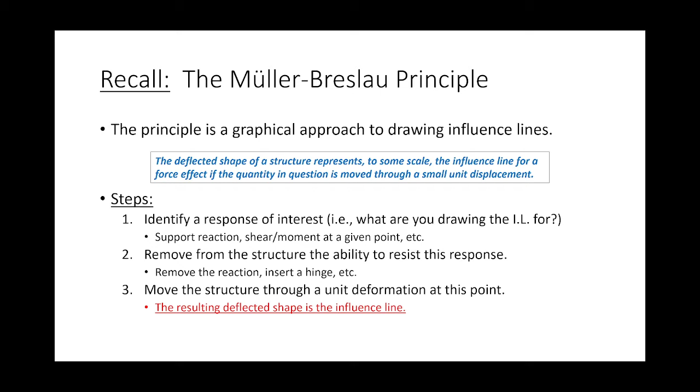What you need to do is remove from the structure the ability to resist that response. Remove the reaction. If it's moment, you insert a hinge at that location, and we'll talk a little bit more about that today. Then you move that structure through a unit deformation at that point, and the resulting deflected shape is the influence line.

And so when we did influence lines for reactions, this is kind of what we did. I gave you 2 homework problems. One of them was, I'd say, simple, and one of them was maybe not so simple. Is that a fair way of looking at it? One of them was a little bit more involved. But there are some patterns that we recognize for influence lines for reactions.

For example, for reactions, we knew that the influence line equals 1 at the reaction of interest, and 0 at all other reactions. So if I look at the influence line, let's say for the reaction at B, it's 0 at A, 0 at C, but it's 1 at B. Okay? They're always linear. They are influence lines.

They are linear, and internal hinges serve to change the slope of the line. So this beam is comprised of sort of 2 rigid links. Even though we're dealing with deformable structures, because we're removing responses, we're creating unstable mechanisms, so they act like rigid links. So this beam is comprised of 2 rigid links.

So the influence lines for all 3 of these are bilinear, right? One line, two lines, one line, two lines, and even this one is one line, two lines. And the change in slope, the place where the influence line kinks, if you will, and changes slope, is at the hinge. Does that make sense?

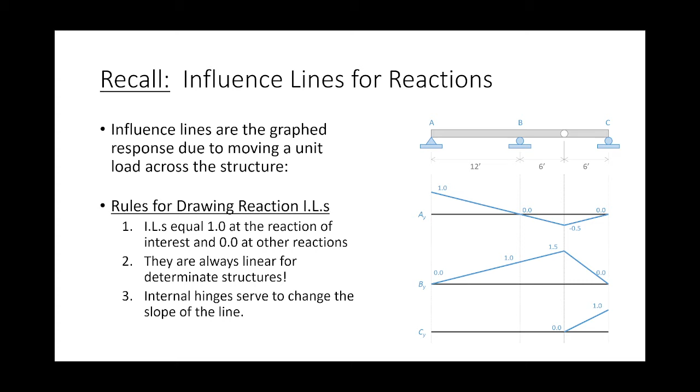Okay, let's talk about influence lines for internal shears and moments. So like before, we have to pick a spot of interest, okay? So let's say I have a simply supported beam, and I'm drawing the influence line for the internal shear and the internal moment at a particular point. So this is a simply supported beam, A and B, and I'm drawing an influence line at this section. I could call it section 1-1.

I could say I want to draw the influence line at point C, or this is point D. It doesn't matter. The book sometimes uses letters to denote the spot, but I usually do section cuts. Now here is what some of these influence lines are going to look like qualitatively.

So this is the influence line for the shear at that section. This is sort of what it looks like, and we'll talk about how to construct this here in a bit. Here's the influence line for the shear at section 1-1.

What's going to happen is the left side is going to tend to deflect downward, and the right side is going to tend to deflect upwards. It's not always the case that one side deflects down and one side deflects up, maybe only one side deflects up or only one side deflects down. But if you have two different changes, the left side's always going down, the right side's always going up, and that owes to our sign convention.

Now, I'm curious if you all have been paying attention. If I were to take a ruler and measure the length of this line right here, what do you think that measurement's going to be? How long do you think that jump is?

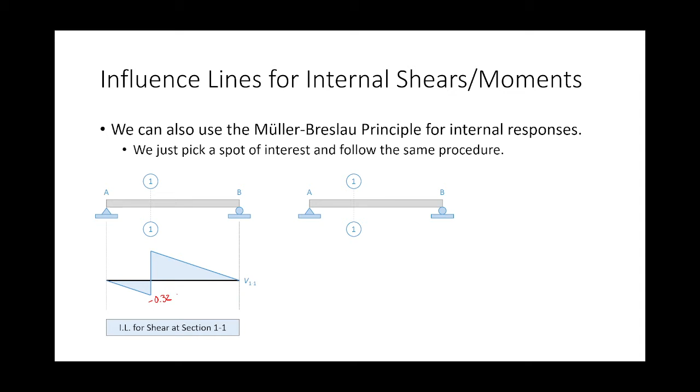So for example, just to put some numbers on this, let me move my keyboard here. If this is negative 0.32, just to put a value on this point right here, then this point right here is going to be positive 0.68. That total jump is always going to be 1, right? If this is positive 0.75, this is negative 0.25. If this is a half, negative a half. If this is 0, that is 1.

The jump is always 1 because that's the magnitude of the load that we're moving across the structure. Does that make sense? Everybody okay with that? Okay, so that's just something to keep in mind.

Okay, now that's what an influence line for shear looks like. Here's what an influence line for moment looks like. Now I will go ahead and tell you that this point right here is not going to be a magnitude of 1. In fact, it's probably going to be something different. It might be a magnitude of 1.5 or 2.6 or whatever. But how we determine this magnitude, just like how we determine how much this is and how much that is, is going to be the focus of today's lecture.

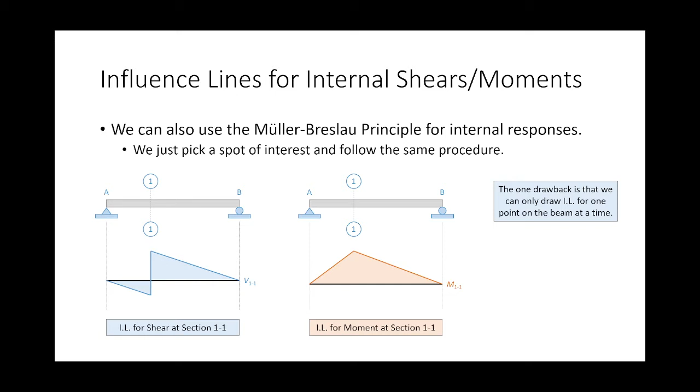Now, just so you are aware, the only drawback to drawing influence lines for internal shears and moments is that you can only draw an influence line for one point at a time. I can draw an influence line right here and get the response. So to be clear, taking this influence line or this influence line doesn't really matter. This influence line tells you what the moment is at this point when the load is anywhere on the structure, and this influence line is telling me what the moment is right there.

So if I can only draw the influence line at one point of the structure at a time, maybe the question is how many points are enough? How many influence lines do I need to draw as an engineer to fully encapsulate the structure? Well, common practice among bridge engineers is to draw influence lines at every 10th point along the span. That's very common in bridge engineering applications. So if I have a 60-foot bridge, I will draw influence lines every 6 feet, for the internal response at 6, 12, 18, 24, and so forth.

And that is usually enough to fully categorize the envelope of loads that a bridge could experience. And you're like, what's an envelope of loads? We'll get to that later.

Okay, now before we review the rules for influence lines for internal shears and moments, we need to go back to our sign conventions. Internal response influence lines follow the sign convention that we've been adopting this entire semester, there's nothing different. So when you cut a section and look to the left, we say downward shears are positive. And when you cut a section and look to the right, we say upward shears are positive.

Do you remember that? So whenever we draw an influence line, let me go back to this. Here's the influence line for shear. The left side went down, the right side went up. That's because, according to our sign convention, the left side goes down, the right side goes up. So that's why our influence lines for shears look the way they do.

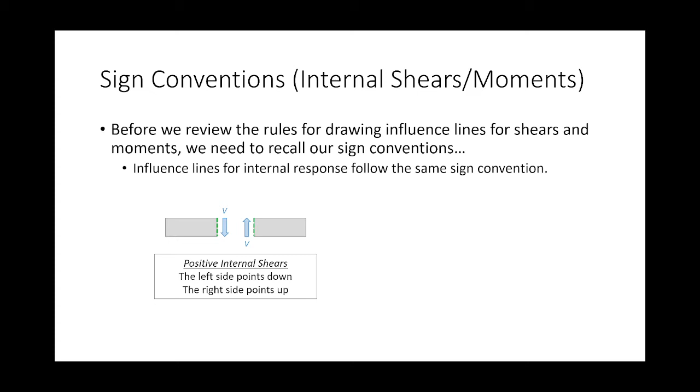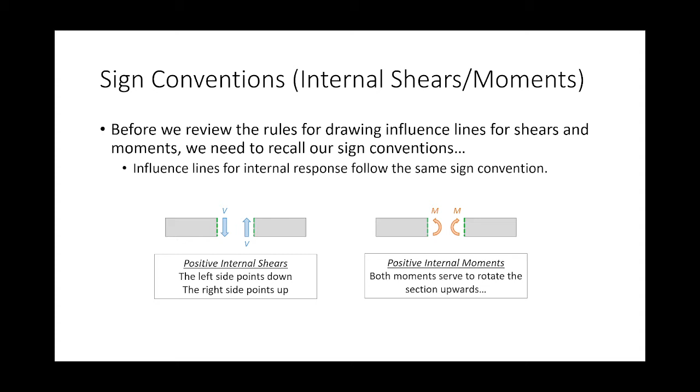For moments, this is our sign convention that we've been using. Whenever we cut a section and look to the left, that's what the moments look like. Cut a section, look to the right, that's what moments look like. Those are what positive moments look like. So look at what's happening with the moments right here. If here's my point, they both serve to sort of rotate it up like that. Here's the influence line. They're both rotated up. Does that make sense?

Okay, let's talk about these one at a time. Let's get into some details. This is kind of important. Let's look at the influence lines for drawing internal shears.

So we go to the Mueller-Breslau principle. We release from the structure the ability to resist shear at the point of interest. So what that means analytically is we institute a shear release. Now we've never dealt with shear releases before in here. This is the first time and really only time we'll deal with them in structural analysis. But the long story short is that a shear release releases the ability to resist shear, but not the ability to resist moment. So I could take that section and shear it, but I can't bend it. It'll just freely displace.

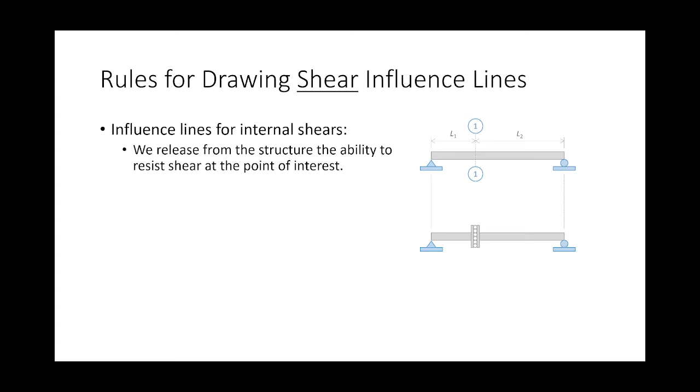Now what that means is this, and you'll understand it when we look at the final shape here in a second. So I release from the structure the ability to resist shear, and then I move that point through a unit displacement. That unit displacement typically means that the left side tends downward, the right side tends upward, and there's my influence line. I propose that total jump is 1. Now that total jump is 1, but that doesn't tell us how to determine the size of those jumps. This might be 0.4, negative 0.4, and this might be positive 0.6. This might be negative 0.8, positive 0.2. How do we determine the size of those jumps?

Well, if you recall, this is a shear release, not a moment release. So we have to release the shear while at the same time attaining moment equilibrium. The way that we attain moment equilibrium is that in order to release the shear and not the moment, these two lines have to be at the same slope. So when we construct our influence line, we know that this height plus this height equals 1, and we know that this slope ratio, h1 to this length, equals h2 to this length. Once we've got that, we can solve for one of our heights very easily, and then the rest is just plug and chug with slope ratios. Don't worry, we got an example we're going to do here in a bit. This is actually really, really easy. Okay, with me so far?

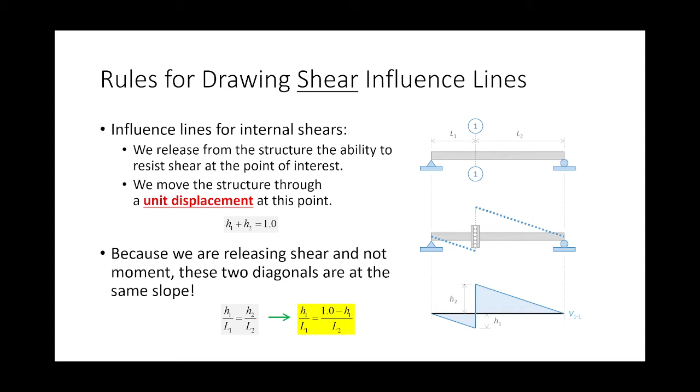Okay, this is shear influence lines. Now let's look at moment. With moment, we identify a point of interest and we remove from the structure the ability to resist moment. Now that one's easy. We install a hinge. So whenever we're drawing an influence line for moment, we place an internal hinge at the point in question.

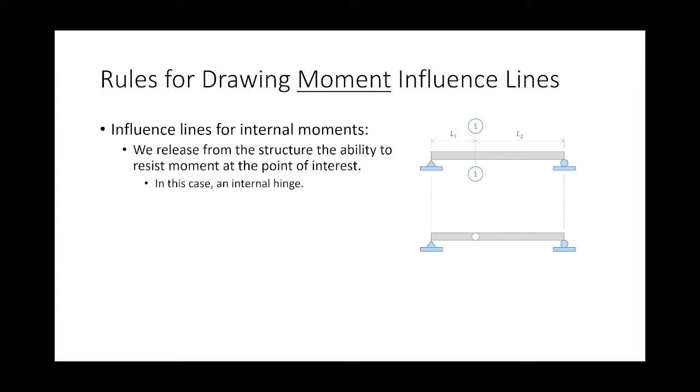We then move that point through a unit deformation, but because we're talking about moments, we move it through a unit rotation. What a unit rotation means is that I rotate this up a little bit and I rotate this up a little bit. And when I say unit rotation, what I'm saying is that the slope of this line plus the slope of this line has to equal 1. So the slope of these two lines has to equal 1.

The slope of this line is rise over run, h over L1. The slope of this line, rise over run, h over L2. So h over L1 plus h over L2 is 1. I can easily solve for h. Does that make sense? Don't worry, we're not going to just say good luck. We're going to go do some examples.

Well, yes, but you're solving for the height so that doesn't happen. Don't worry, you'll just follow along with it.

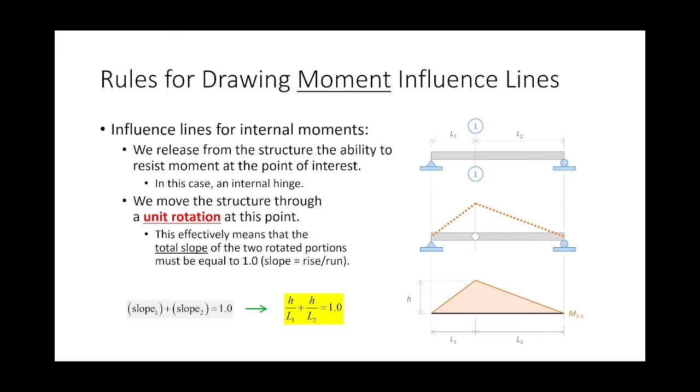Any questions? All right, here's the summary slide. This is the expression for shear influence lines that we can derive. If you want to plug and chug, you can, but I find it easier to just look at the influence lines and know the patterns. This is the expression for shear influence lines, and this is the expression for moment influence lines.

Now, the patterns are different. What do I mean by the patterns? Influence lines for internal response will always equal 0 at all of the reactions. Here's this beam, here's this table. If I'm sitting right here on the leg of the table, how much internal response is right here? Nothing, right? Because I'm focusing all of my load on the leg. The table isn't seeing anything. It's only until the load actually starts acting on the table that I generate internal response in the beam.

If the unit load is over the reaction, the beam experiences no load. They're always linear. And again, internal hinges serve to change the slope of the line. So, for example, with this beam, if I do the moment influence line, I put a hinge here, 2 rigid links, 2 lines. Does that make sense?

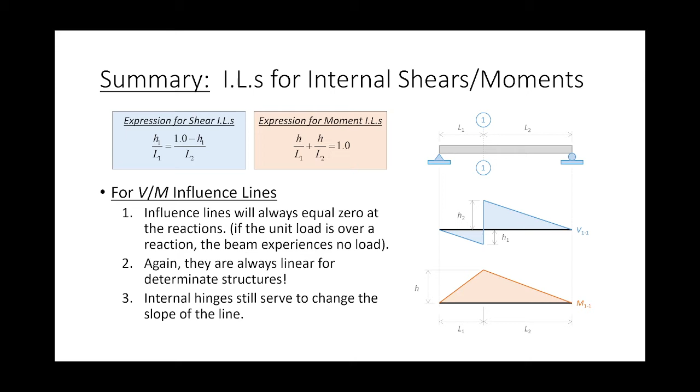Let's do some examples. I think the easiest way to understand this is to do some examples. If you remember, we're going to do example 1 and example 2. We already did these examples, we did the reactions. Now we're going to do the influence lines for internal shear and moment. For this first one, you're going to do internal shear and moment right here, next one internal shear and moment right here. So let's see what happens.

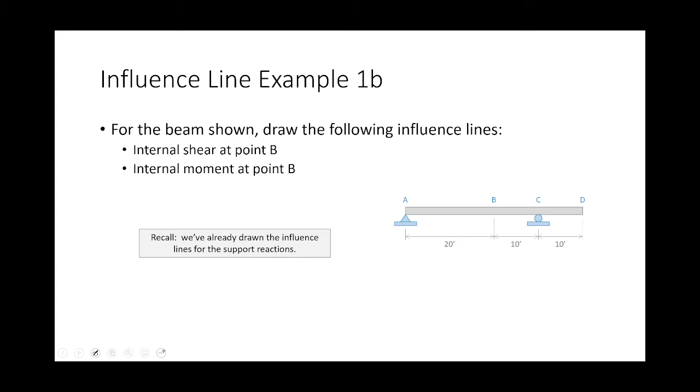The dean is calling me. Give me one second. I will say I'm in class.

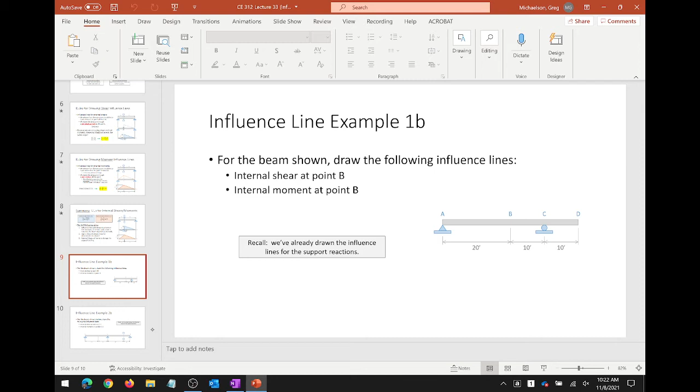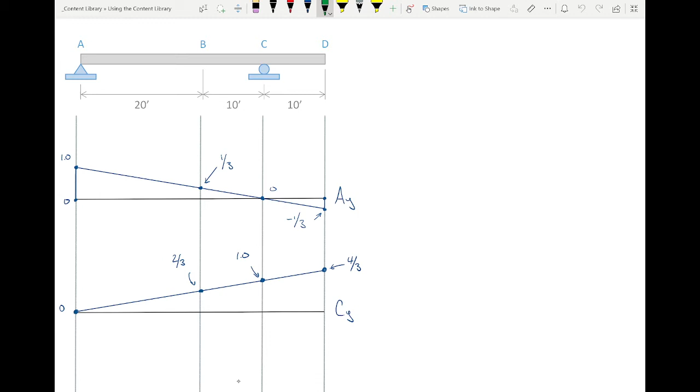All right, so let me pull this up. Okay, so here's the influence line for example 1. Here's the influence line for the reaction at A. Here's the influence line for the reaction at C. Is everybody okay with that? Hopefully that should have been pretty simple.

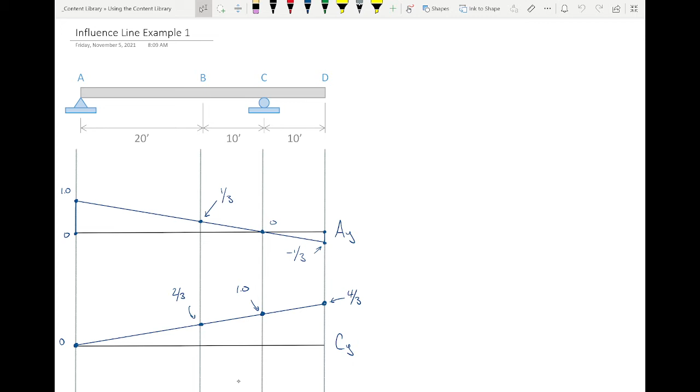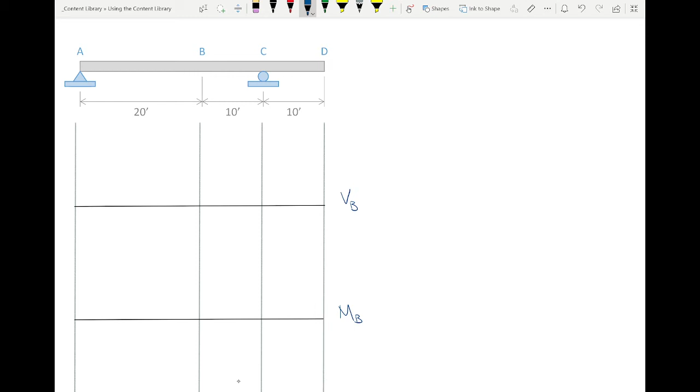Now let's do the influence line for the shear at B, the influence line for the moment at B. For both of these influence lines, the value is going to be 0 at the supports. It's going to cross through 0 at the supports. If I put a load directly at point C, there is nothing going on inside that beam, period. If I put a load at point A, there's nothing going on inside that beam, period. Does that make sense?

Now let's do the shear influence line first. So what I'm doing is I'm installing that shear release at point B, and I am deforming it in such a way that the left side goes down, the right side goes up. But I am doing that in such a way that the slope of those two lines are the same. So I propose...

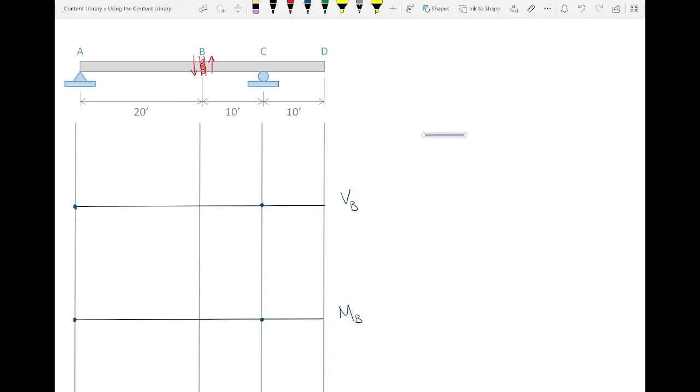That the influence line probably looks something like this, and probably something like this. That's probably the influence line right there. Boom, boom, boom, there's your influence line. Does that make sense? The shape—I'm not talking about the values, let's just talk about the shape. And if it doesn't, please stop and ask, Dr. Mike, what the heck's going on?

Everybody good? Now, what we need to determine are a couple things. First off, we need to determine, we'll call this H1, H2. We know this value is 0, this value is 0. And we also need to call this V at D. Now, why am I calling this something different? Because once you get H1 and H2, the rest of the influence line comes from slope ratios. The rest of it just comes from the slope ratios.

Let me ask you a question. Numerically, what do you think this is? If this is H2, H2 is to 10 as something is to 10. That's just H2, right? It's just negative H2 because it's going downward. Does that make sense? Okay, so how do we determine these values?

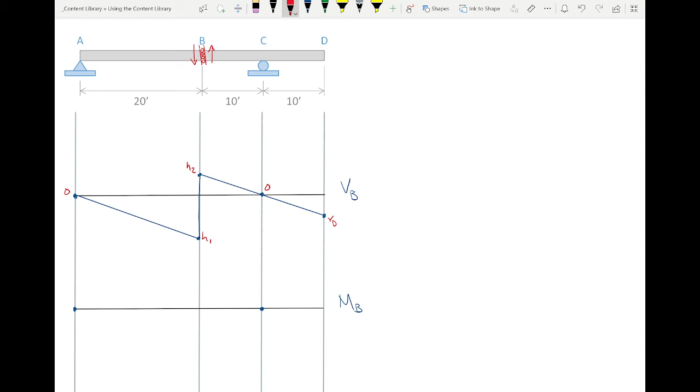Well, so we use similar slope ratios. I propose that H1 is to 20 as H2 is to 10, same slope. So equation 1 is that. Is that okay? And so maybe what I ought to do is just make sure that what we're talking about here is height, so that we're not having to deal with positives and negatives. We'll let the context figure that out.

Now, if everybody's okay with that, help me out with this. What does H1 plus H2 equal? We'll get to that here. But just in general, what does H1 plus H2 equal? One. Now, you've got to do the substitution correctly. H1 is 2H2, so if you said 3H1, it's 3H2.

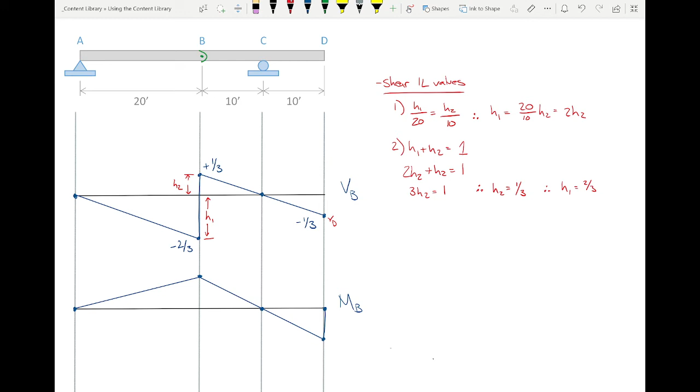And again, what we've got to determine is this height. Now, actually, let me use a different color for that. Let's use green for that. Now, the way that we determine this height is a little different than how we do it for shear, but it's also a lot easier, okay? This height here, we'll call this, hold on, this height here, we'll call this MD, although it's pretty easy to figure out.

The way that we determine moment influence line values is a little easier, because I propose that this slope plus this slope has to equal 1. So we'll call this right here slope 1, call this line here, or this line right here, slope 2. So slope 1 plus slope 2 is 1. How do we express the slope of this line? I'm asking, I want somebody to tell me. What's the slope of that line? H over 20, right?

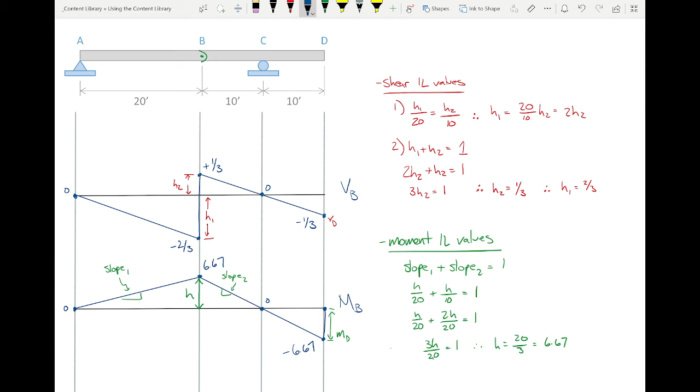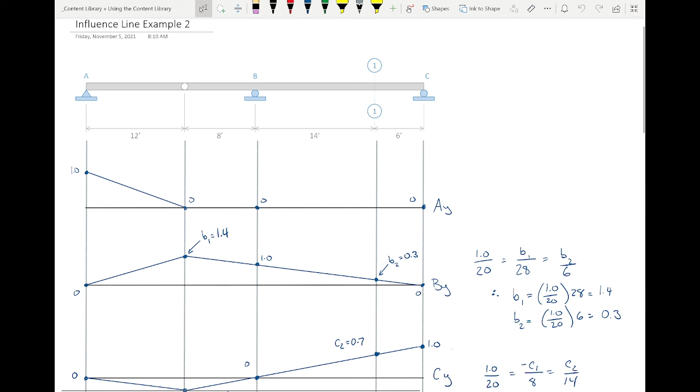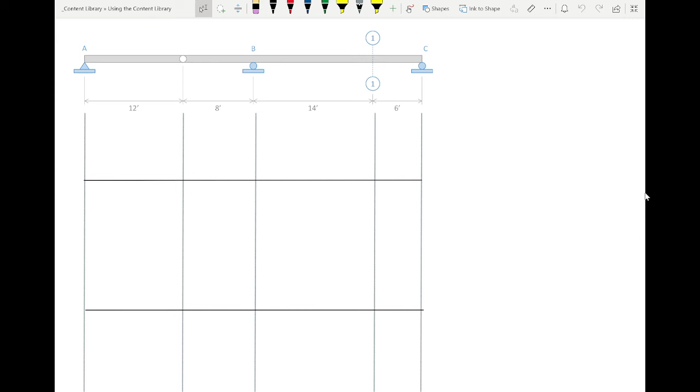Let's look at this one. Remember this one, we did the reaction influence lines. Now we're going to do shear and moment. I'm going to give you a sec to copy this down because I want you to pay attention to what we're doing. I don't want that part to be a problem. So just so you are aware, we're doing the influence line. Here, I'll put this down. We're doing the influence line for the shear at section 1-1, and the moment at section 1-1.

One of the other things that does help when you're drawing influence lines, in addition to having a straight edge, is to actually try and draw them to scale. Because if you're drawing them to scale according to the rules, it can actually help illuminate what the values should be, and when you do the math at the end of the day, it matches what you thought it was going to be. That piece of advice is particularly true about shear influence lines. You'll see that here in a second.

I'll give you a sec. We've got plenty of time. I don't want to hurry this. I still see some folks writing some stuff down.

I told you I was going to take your understanding of structural analysis, turn it upside down, flip it inside out, and turn it into a pretzel.

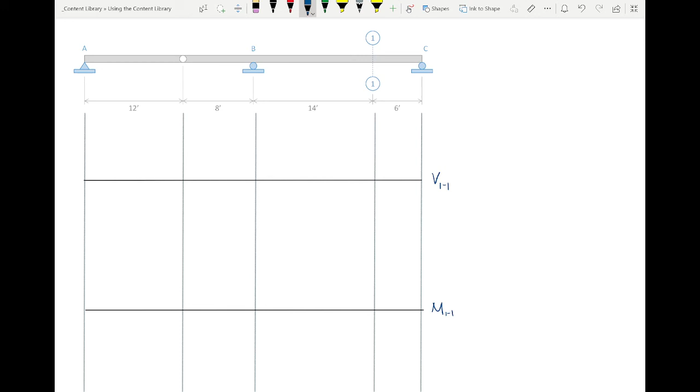So 0, 0, 0. Is the same thing true on the influence line below? Yes, 100%. 0, 0, 0. So before we even put ruler to paper, straight edge to paper, and actually draw this stuff out, that should be known, okay?

All right, now let's see if we can construct this influence line. Let's start off with shear. We are going to institute a shear release. Left side's going to go down, right side's going to go up.

Now before we start drawing stuff, let's use our noggins a little bit. If I take that beam at point 1, and I break out my samurai sword or lightsaber if I'm a sci-fi fan, and I slice that beam in half right at point 1, how many rigid lengths is this beam going to be split into? 3, right? There's the rigid length from A to the hinge, from the hinge to the cut, from the cut to C.

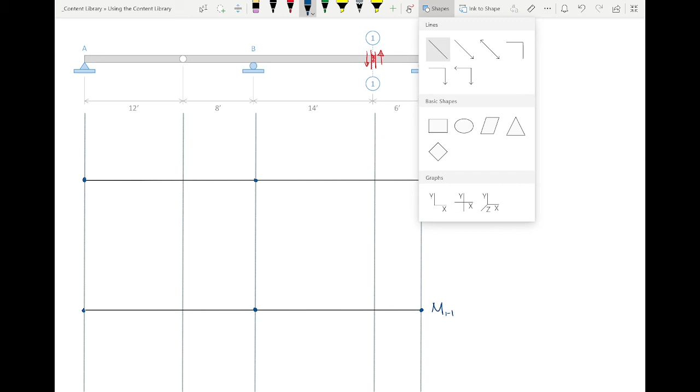And so if that goes like that, then this is going to go up. Is that a fair statement? So, okay, all right, hold on. So what you're telling me then is that the influence line goes, wait, hold on, sort of goes, I don't know, like this. Oh, my thunder's getting stolen by OneNote here.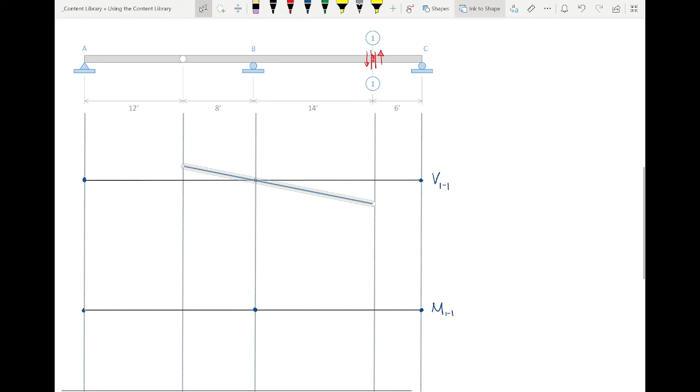Why is it not liking the object snap right there? It does not like my object snap right there. I do not like that. I'm going to undo that. I'm going to see if I can fix that object snap a little bit. There we go. That's going to bug me if I don't get that right.

So that one needs to go like that. It's like you have to hover with it and then it stops snapping. Now I've tried desperately to find object snap settings and I cannot. So would you agree with that so far? And so the right side needs to go up like this, right?

Now, remember what I said about drawing at the same scale? I'm going to try and draw this line going up, but I'm going to try and do it at the same slope. Let's see if I can do that. So, all right, hold on. So this needs to go like that. And what do you think? Something like, how'd I do? Is that like the same slope?

This line and this line, are they at the same slope? Kinda. So, would you agree that...

So first off, that's our influence line, and we need to find H1 and H2. Now, I took great care to draw this at scale. Let's also denote the values that we know, right? This is 0, 0, 0.

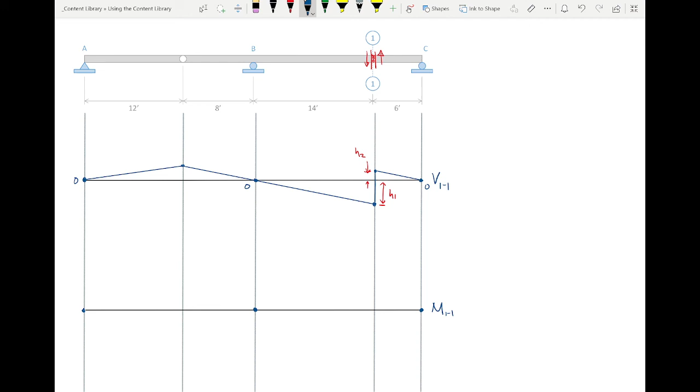Drawing this to scale, what can you tell me about H1 and H2? But, yeah, that's true when you sum them up, but to scale, which one's bigger? H1's bigger, right, by drawing it to scale. Now let's see if the math bears that out.

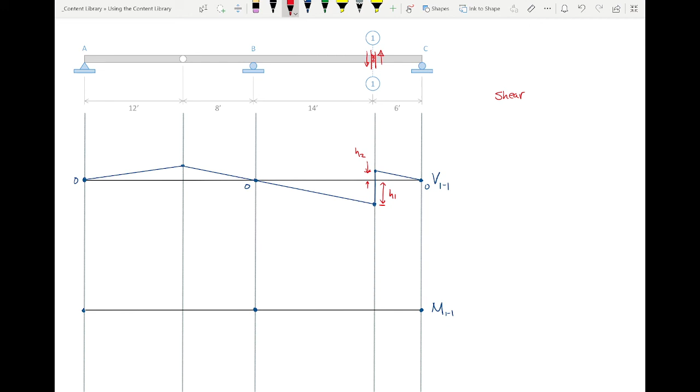So let's look at shear influence line values. Actually, let me move this up a little bit. So, H1 is to what as H2 is to what?

What's the slope of this line? H1 is to what? 14. What about this line right here? H2 is to what? 6. So H1 is to 14 as H2 is to 6. So H1 is 14 over 6 times H2. Did I do that right? How'd I do?

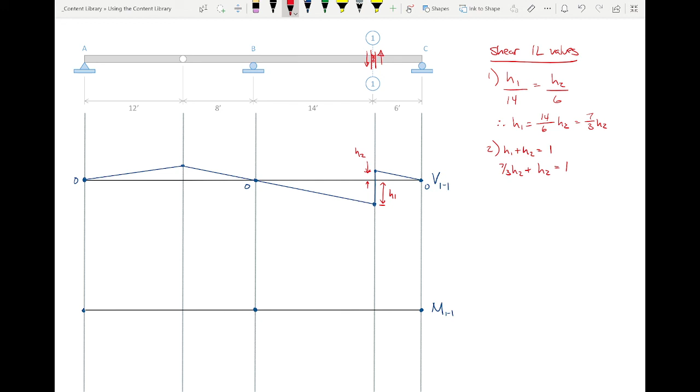Now, as Mr. Adams put, H1 plus H2 equals 1. So instead of H1, I'm going to substitute 7/3 H2. Did I do that right? H1 is this, so instead of H1, I put that. So if I have 7/3 H2 plus H2, how much H2 do I have? 10/3, so 10/3 H2.

I'm veering. What's H2? 3 over 10. And if H2 is 3/10, what's H1? 7/10. So applying my signs, this is negative 0.7, this is plus 0.3. See what I meant by drawing it to scale? We found that H1 should be bigger, and in fact it was.

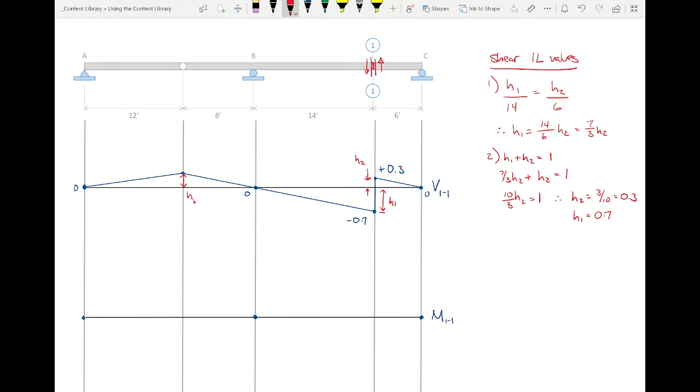Now we're missing a value, aren't we? We're missing this one. How do we determine that? Well, let's see, we need to determine this height right here, let's call it height at the hinge. Anybody know how we're going to determine that height? Using H1, exactly, because H1 is to 14 as something is to 8, right?

It's just a line. So H1 is to 14 as H1 of the hinge, or H of the hinge, is to 8. So therefore, what is 8 over 14 times 0.7? Say it again, 0.4. Do I have a second on that?

That's the influence line for shear at section 1-1. Now, I don't want to barrel through this. Is this making sense?

Now we're going to real quickly do the moment at section 1-1, but is everybody clear on this? Okay, so watch what we're going to do. Everybody pay attention. We are going to insert a hinge at section 1-1.

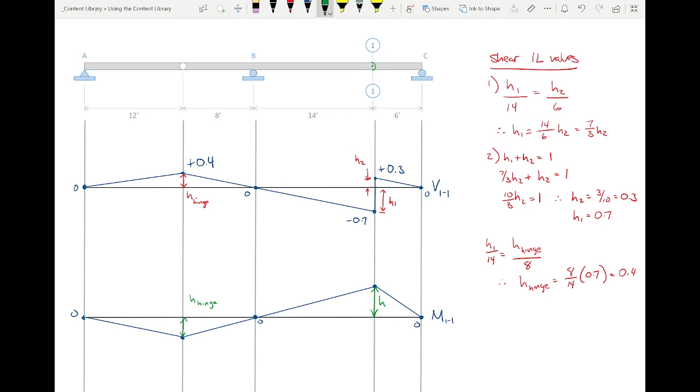What we've got to find is this H first, then we got to find this one, which is again a height at the hinge. Now, the way that we're going to do that, and I know I'll probably get close to running out of time, but I'll do this pretty quickly. With moment, the math is actually a lot easier.

This height needs to be that magic height so that the slope of this line and the slope of this line is 1. So this is slope 1, this is slope 2. So slope 1 plus slope 2 is 1. Slope 1 is h over 14 plus, in this case, h over 6.

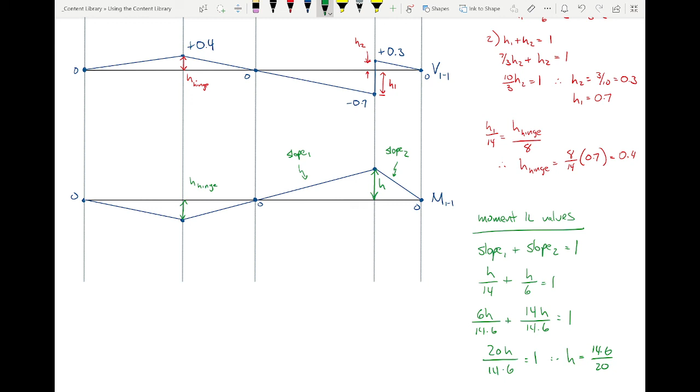And so what I'm going to do is use common denominators, right? So for this first one, I'm going to do 6h over 14 times 6 plus 14h over 14 times 6 is 1, plus... And so 20h over 14 times 6 is 1. H is 14 times 6 over 20. 14 times 6. And so in this case, when you chug that out, you're going to get an H of 4.2.

So that's going to be plus 4.2 right there on the influence line. And so the only thing left to do is to use the slope ratio here to determine the remaining height. So H is to 14 as H hinge is to 8, just like we did before with the shear influence line. H hinge is 8 over 14. In this case, it's 4.2. So when you chug that out, you get a value of 2.4. So this value here is negative 2.4.

Let me clean that up a little bit. That one's a little weird, isn't it? Again, we haven't actually started using these influence lines yet. We will. Right now I just want you to be comfortable with constructing them. Here, I'll put a little line through this in the notes so that you know it's a different calculation.